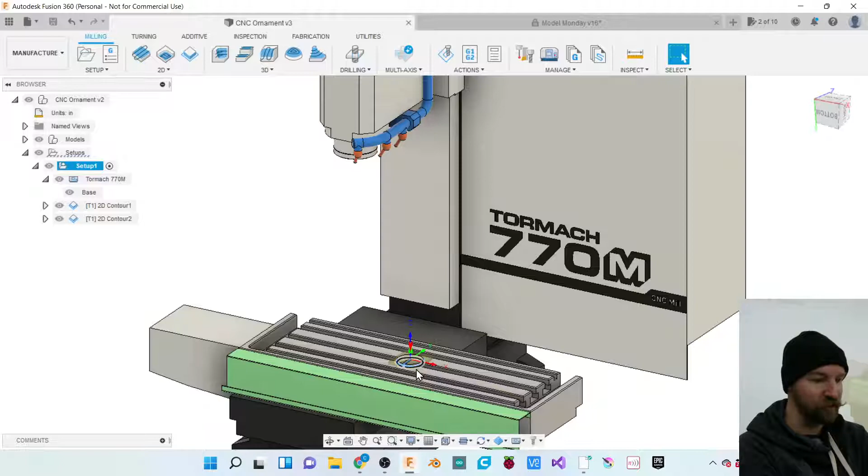So today we're going to draw a Christmas ornament. This was the terrible ornament that I drew as kind of preparation for class here, but you see it sitting here on our CNC machine at the other building. We'll make it fancier than just a circle. I'm thinking snowflake is what I'm thinking. But just as a test for myself, I made a little simple design just so I can walk myself through the whole process. And speaking of the entire process, let's get started.

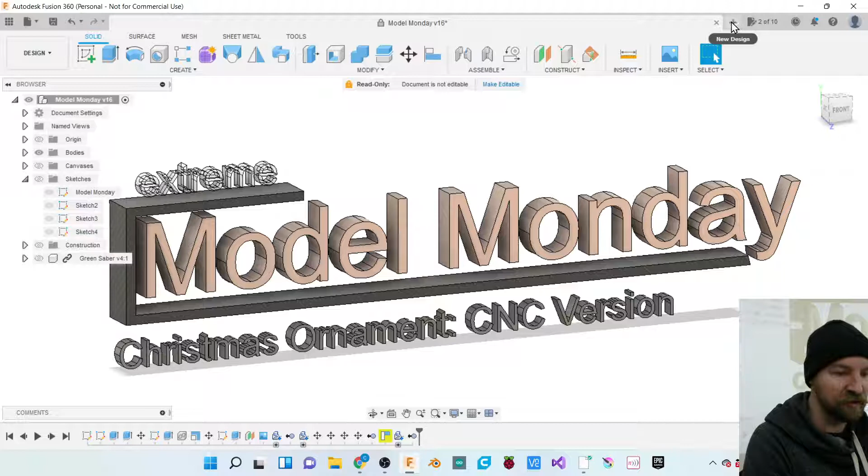So I'm going to start a new document here. I'm going to go ahead and close this document. And I'm going to go ahead up here to my new design plus button here in Fusion 360 and just start a new design here. And now I've got my design, and we can just start by drawing our Christmas ornament. Like I said, I'm thinking snowflake.

So for those of you joining at home, snowflake, I kind of Googled it. Or actually, you know what, let's do this. Let's leave it here, and then I'll show everybody. People, I Googled snowflake, and that's kind of what we're aiming at. You know, these are all six-sided designs.

Are snowflakes all six-sided? Mm-hmm. Is that a thing in like nature? Is that why the poles on Saturn are six-sided too? Is it like the same principle? I don't know. Anyway, all right. Probably. Nature, patterns, all that kind of stuff.

So we're gonna design a snowflake. I'll let you drink these in for a couple of seconds. Well, it's kind of like a weird three-sided, six-sided. There we go. That's what we need right there. Faces. That'll be a pain in the butt to draw. So we're going to be more like in this territory or maybe even that territory.

So we're going to draw a single branch of our snowflake, and then we'll use a pattern command to make a pattern of that. And then hopefully in the second half of class, we will be getting into CNC talk and setting up some tool paths to machine our snowflake out of our bricks of gold that we have.

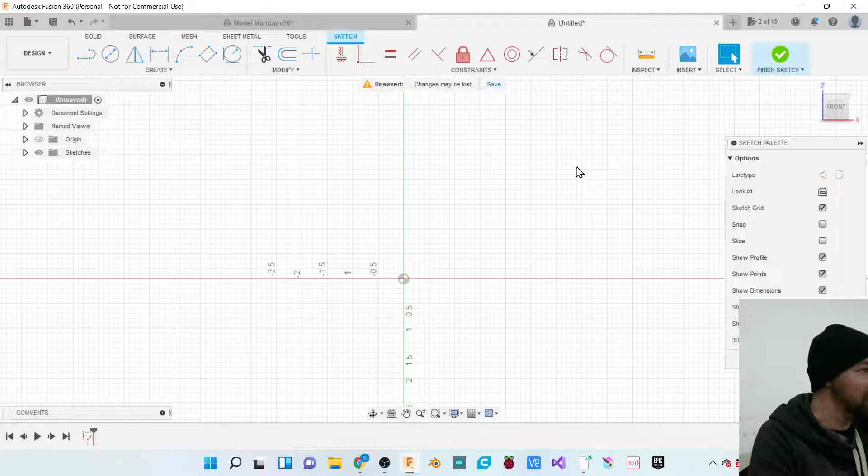So there are natural X, Y, and Z axes here. If you look at our navigation cube up at the top right-hand corner, you can see we're drawing between the Z and the X axis right now. It's totally fine. You can still draw on whatever plane you want to, and I'll show you how to work through that in the next step. I'm purposefully doing it in a way that I will have to make extra steps because normally the Z-axis is the top. Anyway, I'm getting ahead of myself. We're picking any plane to draw on, and we'll cross that bridge later, and maybe I'll reference back to this moment here. So I'm going to start by drawing a circle.

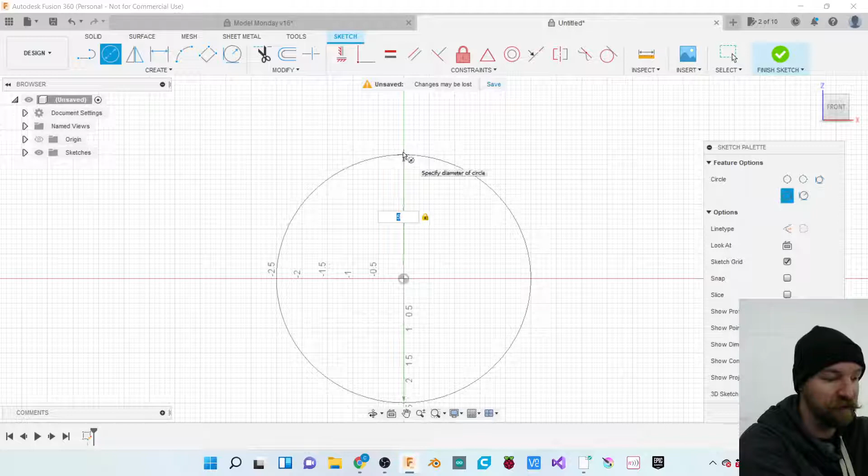So I'm going to grab my circle tool, my center diameter circle tool specifically, and I only want to draw a circle to start off with because I kind of want to define the outside boundaries of my snowflake. For me, it kind of makes sense to ask how big is my snowflake going to be in total? Maybe like 5 inches is a decent size for a Christmas ornament, good size Christmas ornament. So I'm going to type in 5 inches here and then go ahead and hit enter.

And I'm going to change that circle to a construction line, just because we're only using this as reference. I just want to kind of define a boundary for the outside of my snowflake here.

Now I'm going to do one more circle, and that circle is going to be the inside, like the innermost radius of my snowflake here. So I'm going to grab my circle tool one more time. I'll make that circle concentric on the larger circle. Maybe like 1 inch is a decent size. We'll be able to change that later if we want to.

Alright, now that we've got kind of the inner ring of our snowflake drawn, we can think about the, let's call them the arms of our snowflake, right? I'm going to go ahead and start by grabbing my line tool, and I'm just going to define a line that goes from the center of our circle all the way out to the outside edge of our largest circle here. I'm dragging this out straight horizontal. I guess this doesn't really matter. You could make this at any angle you want to, because we're eventually going to make a pattern of these things. But I'm going straight out horizontally here.

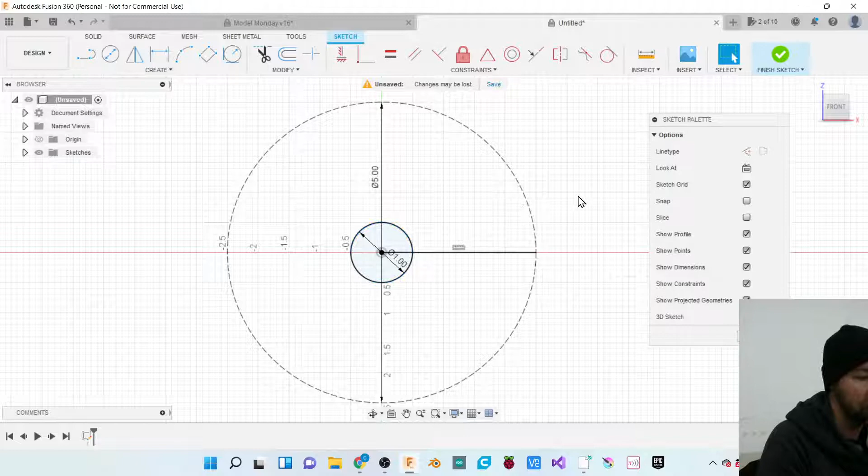And, you know, in order to make the edges of my snowflake, I'm kind of curious. If I just do a couple of things here, I'm kind of curious if this is something I didn't go ahead and do. I wonder if I can use offset. Oh, kind of. I can kind of use offset. Let's try to work that method. So let's define kind of the basic shape that we want to make of the branches of our snowflake just by adding some additional lines here.

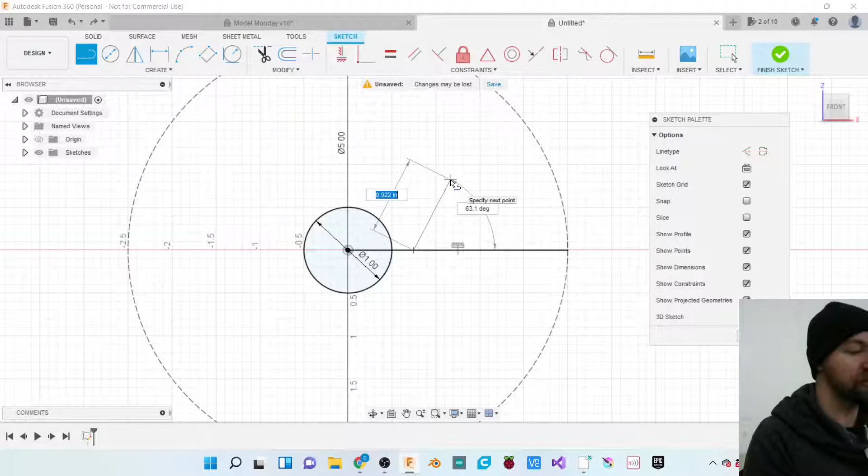So I'm going to grab my line tool and I'm going to draw kind of a line off to an angle like this here, and I'll make kind of a largish line. These are one of those kind of things that I'm just doing by eye, so you don't really have to type in a dimension here, but you certainly can. So if you're getting mathematical about it, this could be like 0.875, this could be like 7/8.

I'm only going to draw the lines off of one side of this because I can mirror over this line and make them symmetric. So I don't have to worry about trying to draw another line at this exact angle. Maybe I'll make 3 of these lines here. Something worth noting here, if I make a line like this and I say, oh, you know what, I'd really like all 3 of these lines to be parallel to each other, I can do that by adding some constraints after the fact.

Now, you can draw whatever lines you'd like and make them at whatever angle you want them to be. But if you want to, in this constraints menu here, we can choose this parallel option. And now I can click on the first line and then click on the second line, and that jumps into parallel, and I can even click on the third line, and that'll jump into parallel with that too, which is kind of nice. I can drag these around and move them wherever I need them to be here.

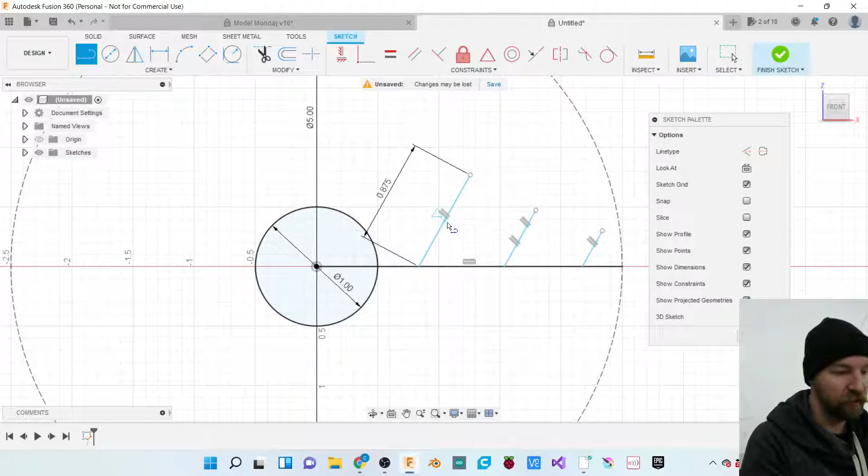In fact, maybe on this bottom, I might regret this later, but just on this bottommost branch here, I'll have another branch that comes off of it. So I'll give you a second to draw that, or draw what your snowflake is going to be.

Hey Tom, how you doing? We're doing snowflakes today. Snowflakes slash CNC ornament. So I hope you brought your brick of gold, because we're going to be machining it later.

And so the goal, I don't know if you're following along at home, but we've drawn a 5-inch circle that we've turned into a construction line, because we're just using this as a gauge for, oh, I suppose you can't even see my screen. I'm referencing my screen here. We're just using the circle for a gauge on how large our snowflake is going to be here. And now we've drawn kind of the basic skeleton. We also have a smaller 1-inch circle in the inside here. And then I've got kind of the skeleton of what my snowflake arm is going to look like here. At least half of my snowflake arm.

So once we've got our snowflake arm half drawn, in order to make a duplicate of that over on the other side, we can use our mirror command. So I'm actually going to do this twice, because I want to duplicate this arm of my snowflake arm as well. So I'm going to go ahead and grab my mirror tool from my create menu. So I'll go ahead and click on create, and then come down to mirror.

And the object that I'm going to mirror is that little line there. And then I'm going to mirror it over this line right here. And then I'll say OK. So now I've got that mirrored over, and I'm going to do that same operation for all these lines here. So I'll come up to the create menu, I'll scroll down to mirror.

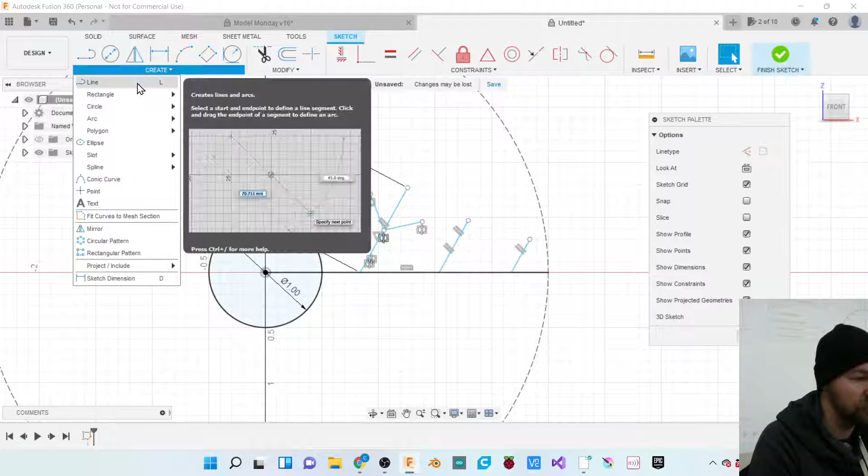I'm going to choose the objects that I'm mirroring. For me it's 5 objects, but you may have more or less depending on the kind of snowflake you've designed. And then the mirror line is going to be that line that we drew from the center of our circle all the way out to our 5-inch construction circle there. And then I'm going to say OK.

Alright, so now comes the fun part, because we've got the basic kind of skeleton of our snowflake arm, but we need to give it some thickness. It needs some mass. These snowflakes, they're not 4th dimensional snowflakes that are like folding through the 4th dimension so you can't really see them. They're like regular 3-dimensional snowflakes.

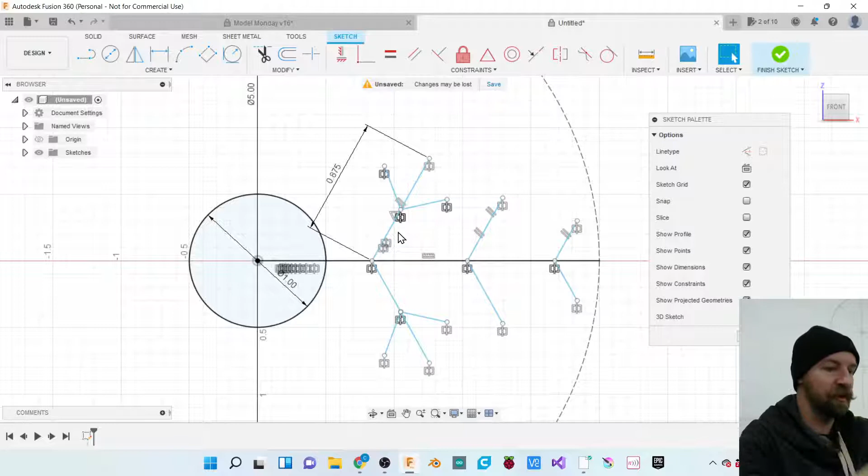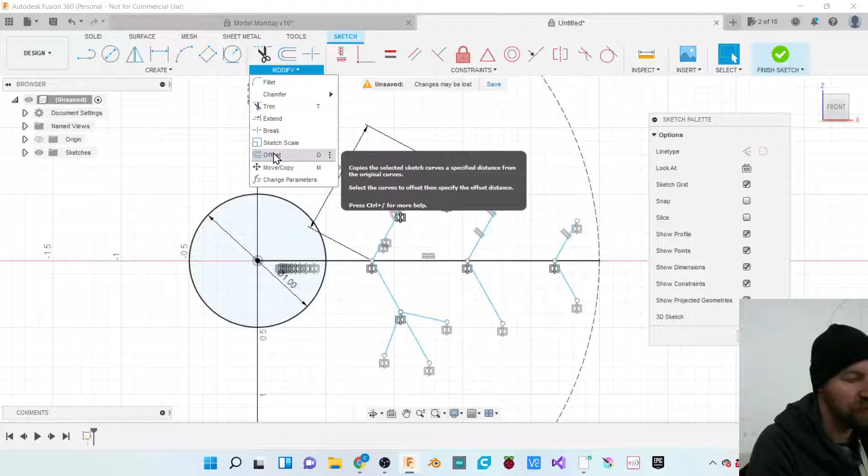So in order to give these some thickness, we're going to use the offset command. Alright, so I'm going to come up to modify and then choose offset. And I'm going to start with my individual arms here. So each of my arms, I'm going to click on both of them, and I'm going to offset them a distance of, let's say, is 1/8 of an inch too much? 1/8 of an inch is too much.

I think I want these things to be 1/8 of an inch total. So I'm going to offset them a distance of half of 1/8 of an inch, 1/16 of an inch, which is 0.0625. Or, in case you didn't know this, you can type in fractions. So if I want to do 1/16 of an inch, I can just type in 1 over 16, and I'll get 1/16 of an inch there. And it converts that to a decimal for me. And it knows that I'm working in a document unit of inches here. So that's why that works.

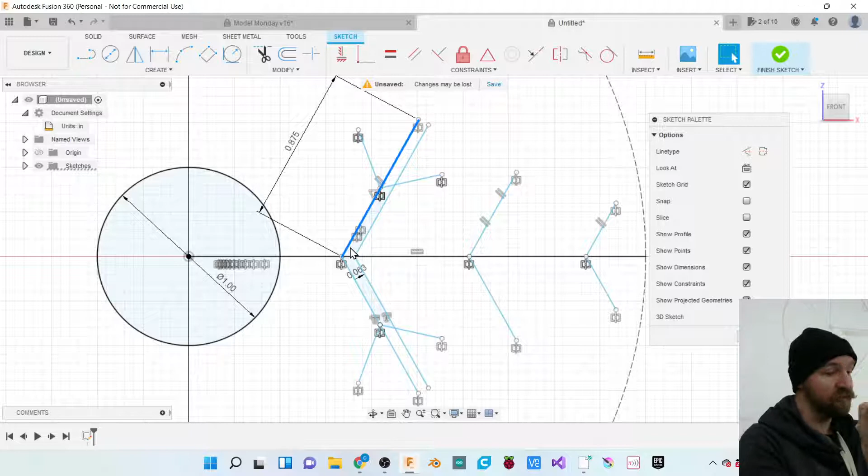Now, I'm going to do that a whole bunch of times because I want this skeleton that we've drawn to represent kind of the center of each one of these arms. So just to illustrate, I'm going to grab my offset tool one more time, except this time I'm going to offset a negative 1/16. And you can see that it's given our arm some thickness here, right?

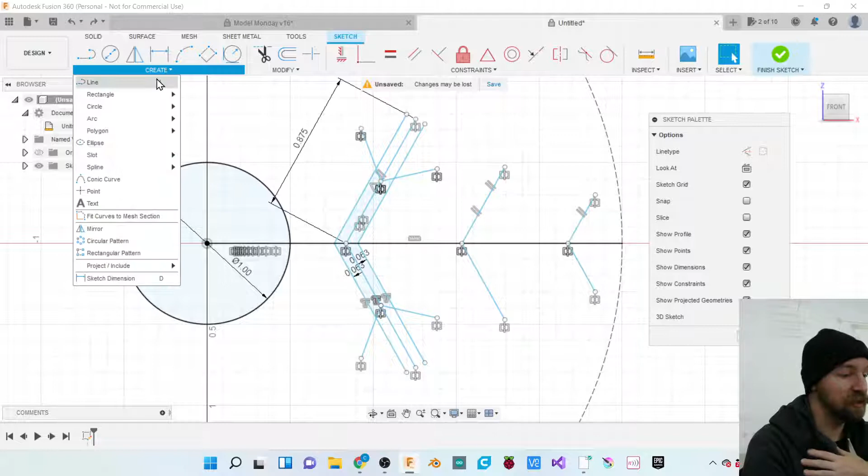And now in order to cap off the arm at the top here, because right now it's just open, you could just draw a line. So I could just take my line tool and I could close off that end. However, I think it would be nice to have these be nice and round. So I'm going to choose in mine to use a special kind of circle. From the circle command here, we're going to go ahead and grab this 2-point circle.

And a 2-point circle will just let us click one time on the one outside edge, and then click a second time on the other outside edge of that, and now we get a fully enclosed shape there that you can see that's nice and filled in there. I'm going to do that to the other side. So I'm going to click and place one side of my circle and click and place the other side of my circle.

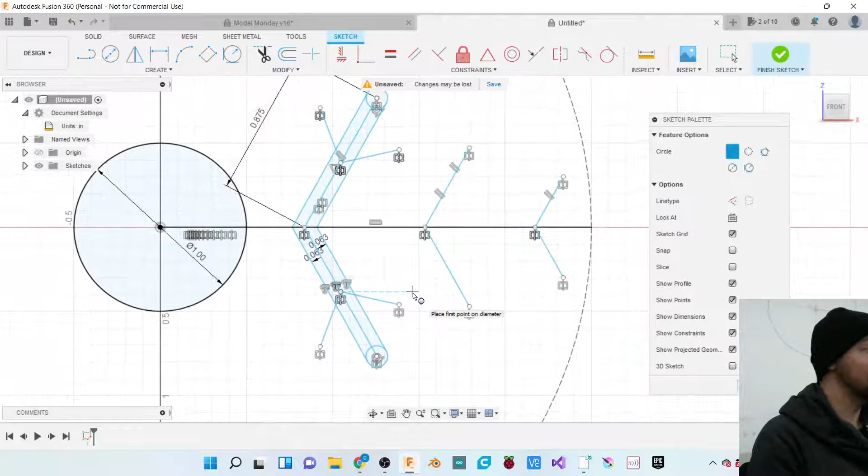Now I'm going to go to town and I'm going to do that operation a bunch more times. So for each one of these arms, I will need to offset it twice and then put some circles at the end of it. I leave it up to you if you've got some little branches on your snowflake, if you want to offset those the same distance. So if you want these to be the same thickness as the other branches or not, I leave that in your capable hands. You're making your own snowflake. You're not making my snowflake.

You're all special little snowflakes in my book, though. That's the important part.

Alright, so 1/16 of an inch.

And a negative 1/16 of an inch.

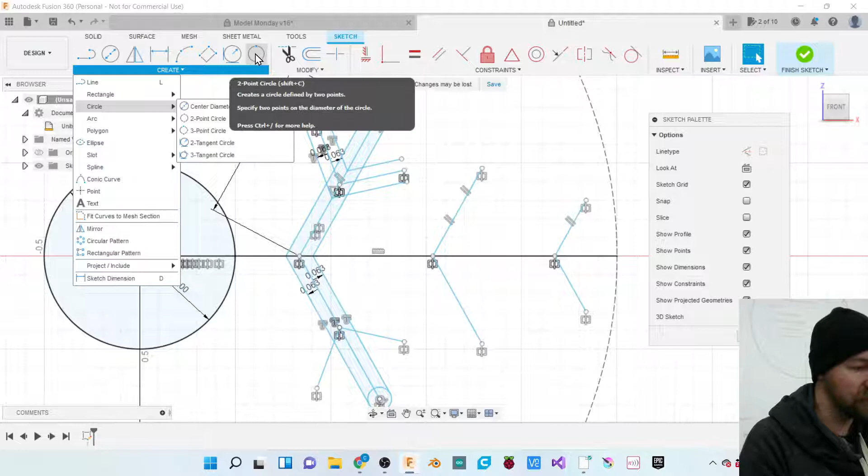Here's one of those occasions where it's like, alright, I know I'm going to be grabbing that 2-point circle command quite often. So if I come up here to this 2-point circle option and click on the little 3 dots that appear when you're hovering over a tool, I'm going to say pin this to my toolbar, and then it adds an icon right up here at the top. So now I can just click on that icon, and it's real easy for me to do those offsets and add my circles faster.

The keyboard shortcut, just in case you are curious, for offset is the O command.

You can bring that to your next Christmas party that you're attending. You know, when you're hanging out at the company Christmas party, talking about keyboard shortcuts, as one does.

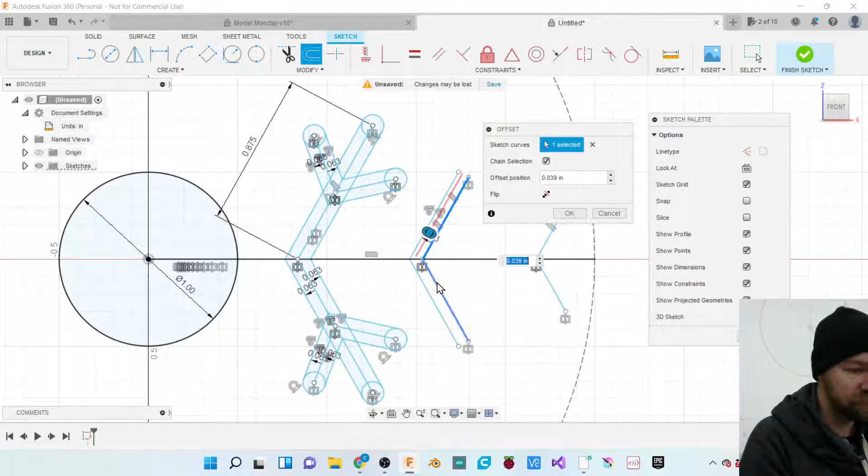Does anybody have any questions so far? I do. So rather than having to do all of these offsets over and over again, couldn't we have done all of the offsets on one side and then mirrored everything across? Okay. You could, yep, totally. Fantastic point. So we mirrored all this stuff from one side over to the other side, and now we're having to offset twice as many things, literally. So yes, we could have offset all these things first, and that probably would have been the smart way to do things.

But I ain't that smart. So, think about how much practice you're getting now using the offset tool. Like so much. On a scale of 1 to so much practice, you're definitely getting so much.

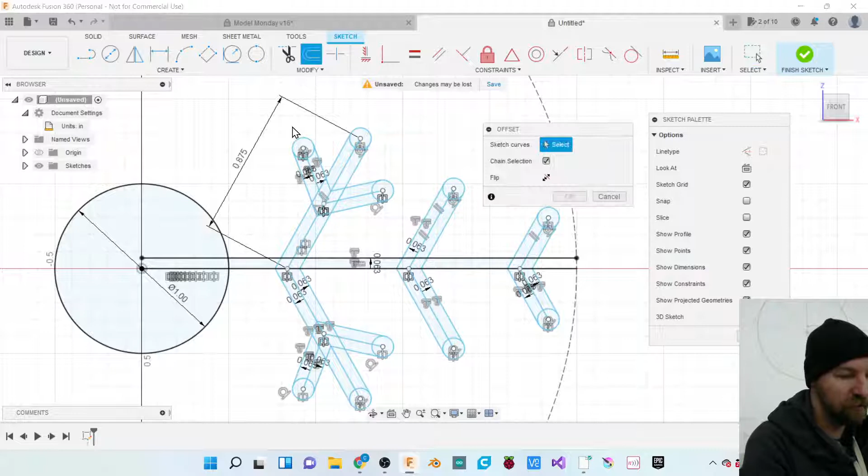And I just have one final offset and circle to do, and that's for this central shaft that runs down the middle of my snowflake arm here. So that's my last offset. And then I'll check in with you guys, see where you're at with your offset parties.

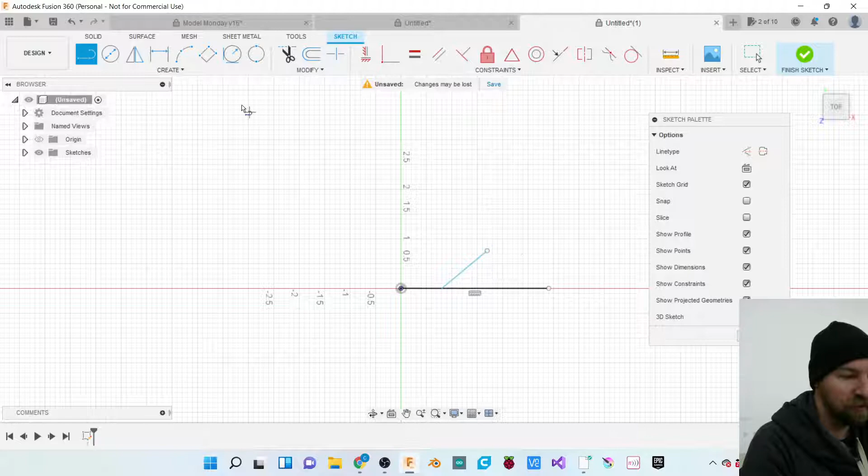Also kind of curious, I've been learning for another class, for the January class, I think we're going to delve into making surfaces instead of dealing with the solid environment. And I'm kind of curious, how are you guys doing? Are you still making your lines? So I'll just do a little experiment for my own purposes and the enjoyment of people watching at home. There is an option here in the surface environment called thicken, and I'm wondering if we could have used that.

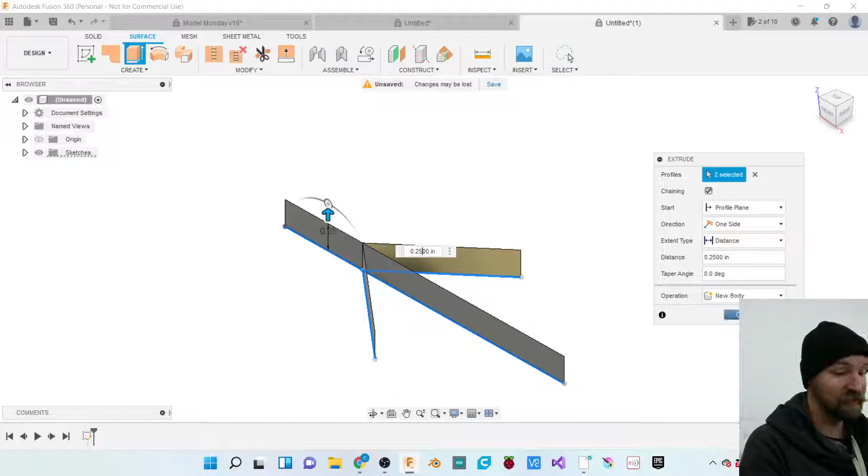So if we've got our little snowflake arm here, normally I keep telling people, oh, you gotta have a fully enclosed shape to extrude it. That is not 100% true, because in the surface environment, you can just extrude flat planes, basically. And so here I've extruded these flat planes that are kind of like the branches of my snowflake, right? And I was just thinking, can I use this thicken command now to give it some thickness? Make it symmetric. Sure can. That 100% works.

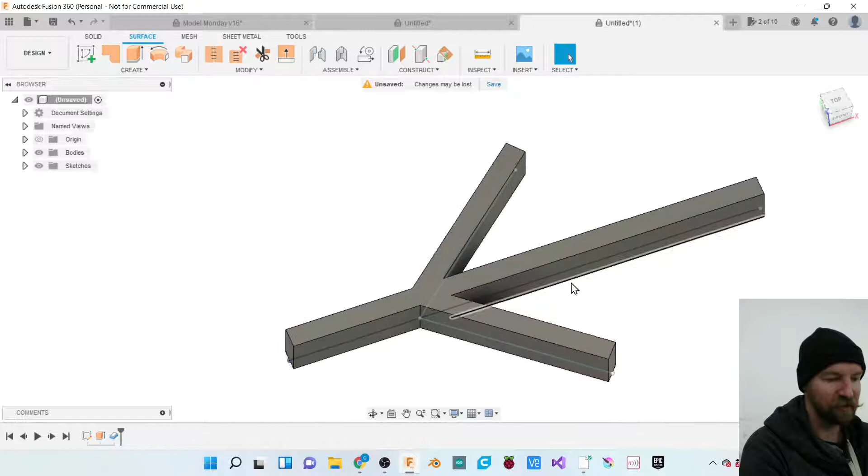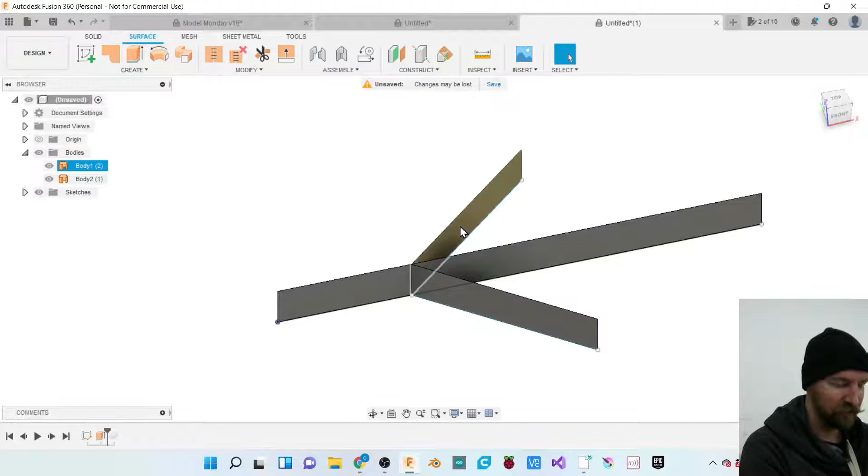So there's another way to do this. Now we don't have our filleted edges here, but that's 100% another way to do that. So the way that I did that is I drew my lines, I drew my shape, whatever kind of arm you're going to have here, and then I extruded them in the surface workspace. This is kind of outside the scope of where I was trying to go with class, but I was just kind of curious. And then I used this thicken option to give them some thickness. So I was able to give some branches of a snowflake some thickness, except I didn't have to do any offsets.

Well, but then that would have robbed us of the offsetting. Yes. Yeah, exactly. And I don't rob you on purpose. I only rob you on accident in this class.

All right. So we got an arm. Cool. Everybody's good? Mike, you good? Slowly. Should I keep going, or you feel like you're in a good spot?

Good-ish spot? I'm okay. I have a feeling Mike's drawing a very ambitious snowflake, which I support.

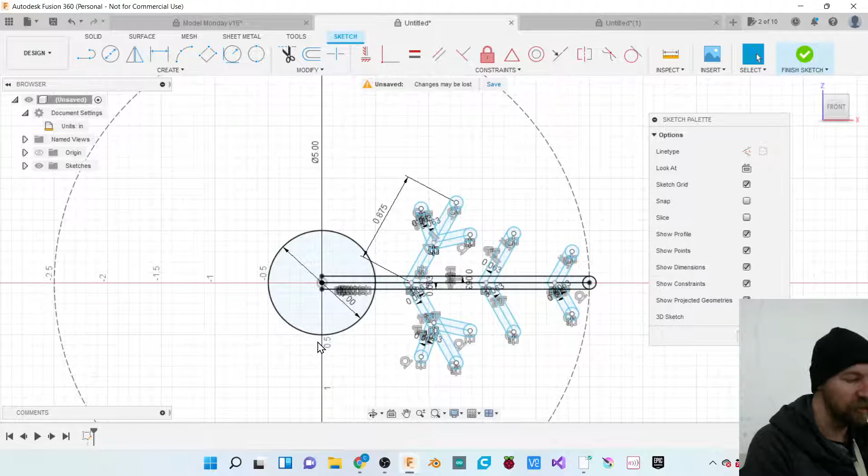All right, cool. So we've got all of the arms of our snowflake drawn, and now I'm going to take a cue here, because we could make a pattern of this drawing and then we'd have a whole lot of stuff that we'd have to go and click on to extrude. But instead, let's just extrude the single arm, and we'll choose to make a pattern of the body instead of a pattern of all those lines. So let me show you what I mean here.

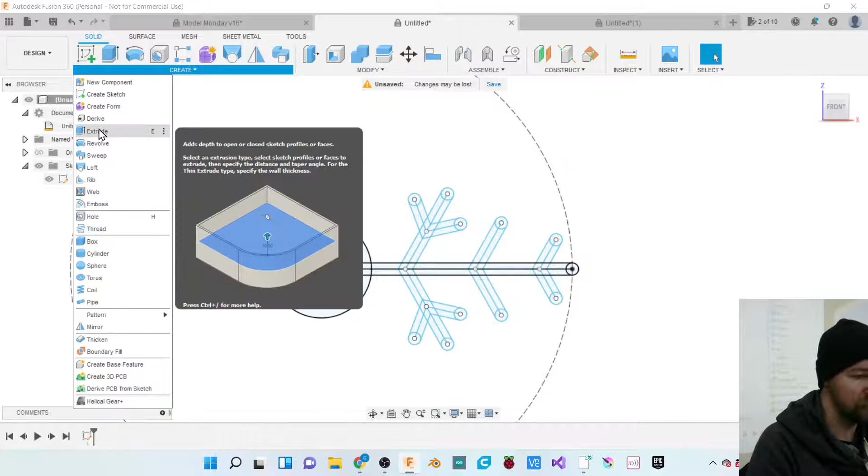So we're gonna say finish sketch. I've got a sketch that I can name now. This sketch is called Snowflake Arm. And now I'm going to extrude said snowflake arm. I'm back in my solid working environment here. So I'll come up here to create and then come down here to extrude. And I'm going to extrude out all these little kibbles and bits here.

In fact, you know what? Maybe this is a good opportunity. See, my Fusion does this a lot. If yours does this too, I am never going to choose this method of selecting. It's never going to be a selection option that I choose because it doesn't make any sense to me. I don't like it. So in this select menu here, you can choose a different selection, and window selection is just objectively better. Feel free to argue with me in the comments. You will be wrong.

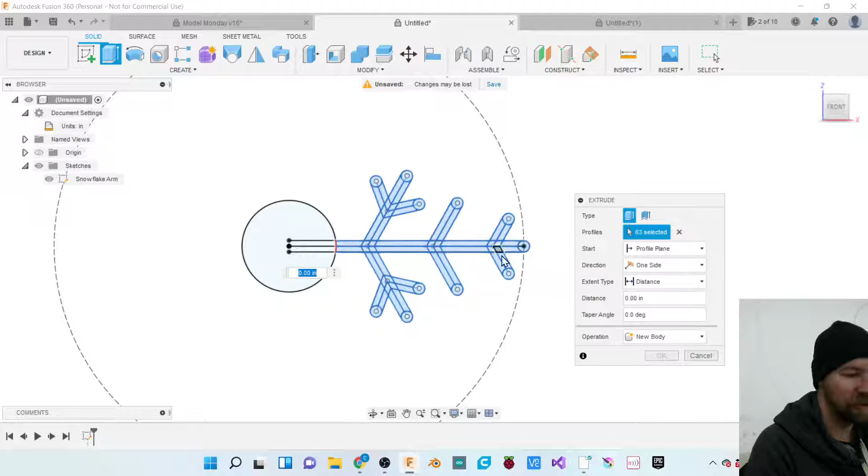I can just select everything, all these outside bits here. I don't need to include this circle. However, if I accidentally drag my window over that, I can just unselect it afterwards. So now I've got all my bits of my snowflake here, and I'm going to extrude them a distance of, let's make it 1/8 of an inch. Seems like a decent sized Christmas ornament thickness. It'll be fine. Alright, cool. So 1/8 of an inch, and then I'm going to say okay. Again, we can type in the decimal equivalent there, or I can type in 1/8, and that will get me to the same place.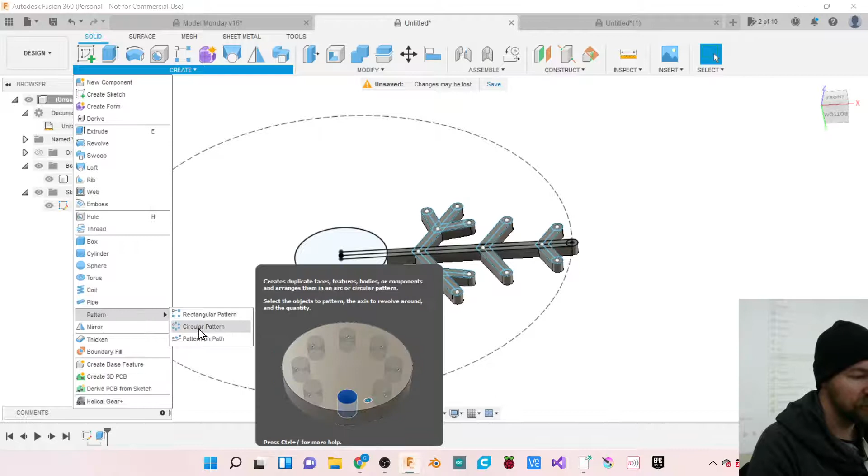Alright, so now we can make a pattern. We've got a body. I'm actually not going to name this body right away because we're going to end up adding to it. So now we can make a pattern of this body. We'll click on the Create menu and then come down to the Pattern option and then Circular Pattern. Now we want to make a pattern not of type faces. We want a pattern of type bodies. So I'm going to choose that bodies option. I can either choose my body in my bodies folder in my browser, or I can click on it in my drawing view. Either one will get me to the same place.

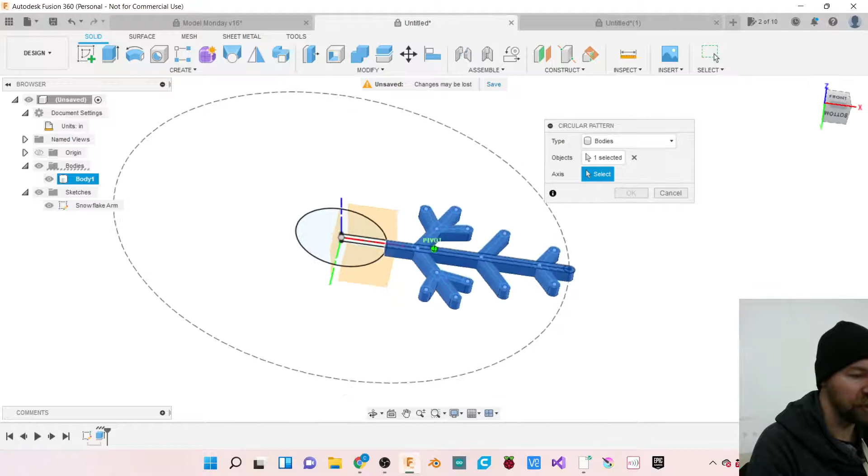And then we're going to choose an axis to revolve that around. So I'm going to click on this select button here, and now I can pick one of the circles that I've drawn, or because I've drawn this around my origin, I can also choose this green axis, which runs right through the middle of the circle. Either one of these circles or that green axis will do the job for me. So I'm just going to pick this circle here.

And now we've got kind of ghosted out images here, and we've determined that snowflakes come in 6s. So we're going to follow the laws of thermodynamics, I guess. Or I guess if it's a Christmas ornament, these follow like Jesus rules. It's Jesus rules. I think you're right. Okay. So quantity is 6.

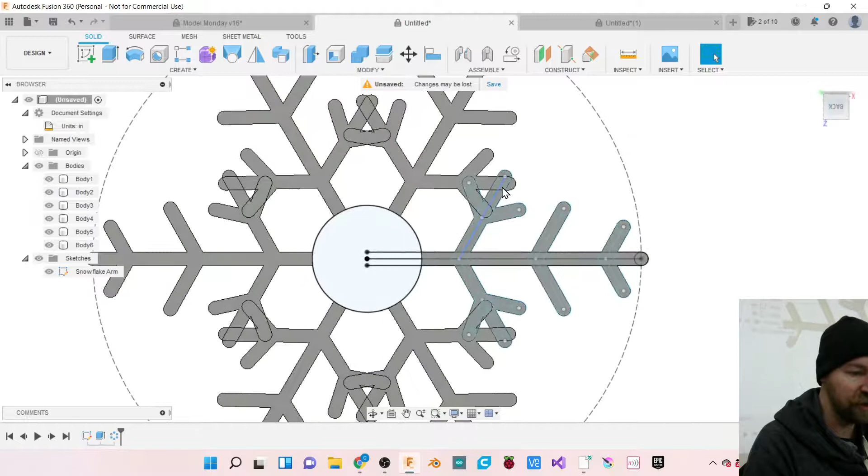And there we go. So we can see that I've got an issue here, and that issue being the arms of my snowflake are colliding with each other. And if you're having this problem too, it's a fairly easy problem to solve. You know what? I don't even know if I need to go edit my sketch to change them. Can I just click and drag on this? Kind of. Not really. So I'm going to go and edit this sketch. And now I go back in time to when I was making this sketch. For some reason I'm looking at the back now. And now I should be able to...

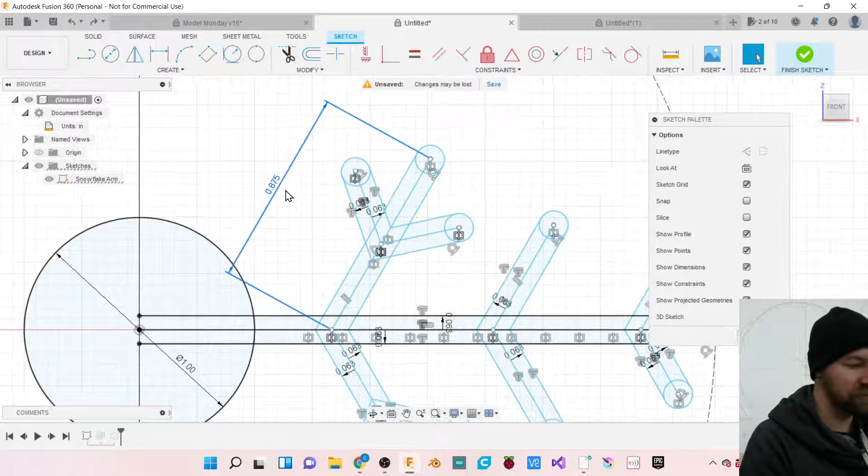I should be able to shorten this, because I defined a distance there. So, tell you what. One thing you can do, instead of defining this distance, I really just want to be able to click and drag on this thing and move it around. So I'm going to highlight this distance that I wrote in here, and I'm just going to delete it.

And now that that's deleted, no, that doesn't want to do that either. Can I drag you in? Do you want to drag in? Not really. So I really need to specify a distance here.

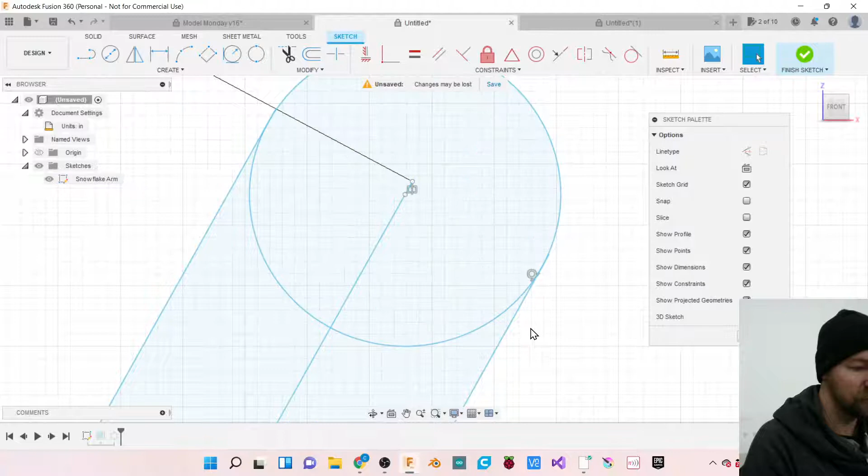Well, that's pretty interesting. So I'm looking at my drawing a little bit closer here. I would expect that these circles that I drew, the center of them would be at the end point of that line that I drew. But they are not, which is kind of interesting. So I'm going to go ahead and add that constraint now after the fact. So I'm going to use a coincident constraint just to...

No, it doesn't want to do that. Please try revising dimensions or constraints. It's interesting because you'd think that that would be concentric, but they are not. So, all right. So what I'm going to do is I'm going to come in here and, gosh, I guess I'm going to delete those, because it doesn't really want to let me move them around. Well, that's kind of it.

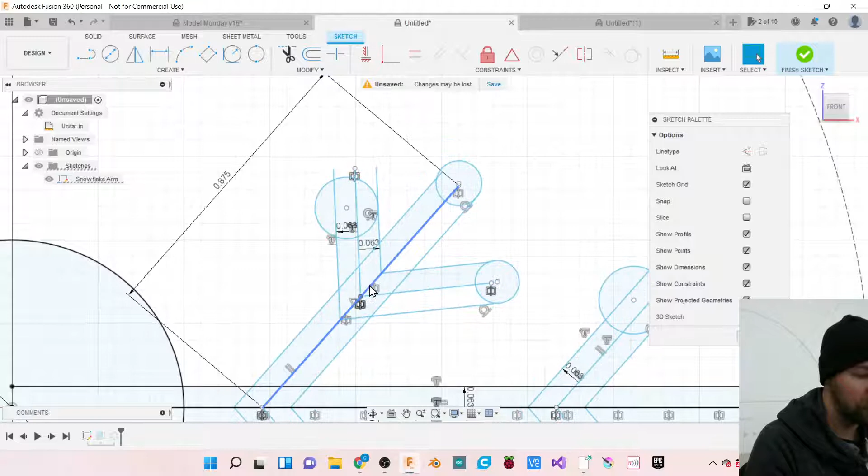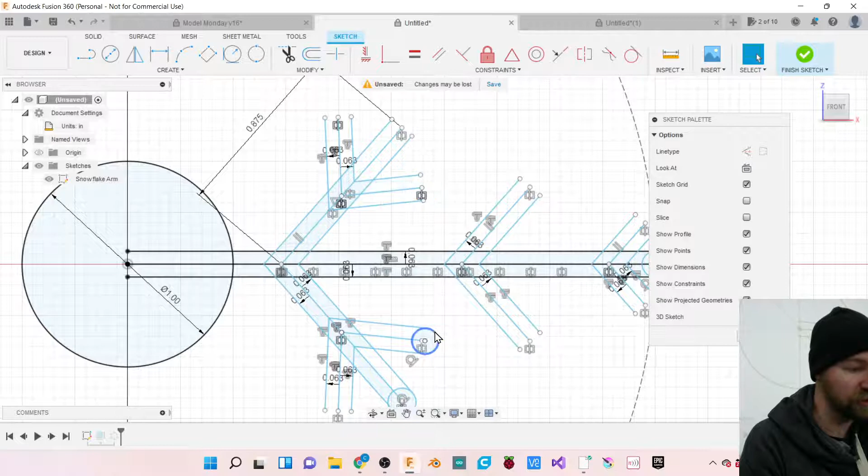My end circles aren't constrained, funnily. Or really, none of this is constrained at all. So you can see that my drawing here is completely blue, and blue means it's unconstrained. Maybe drawing these circles at the end, I think, is screwing me up. So I'm going to delete these circles, and I'm going to see if that solves my issue here. Yeah, it's those circles that were giving me grief.

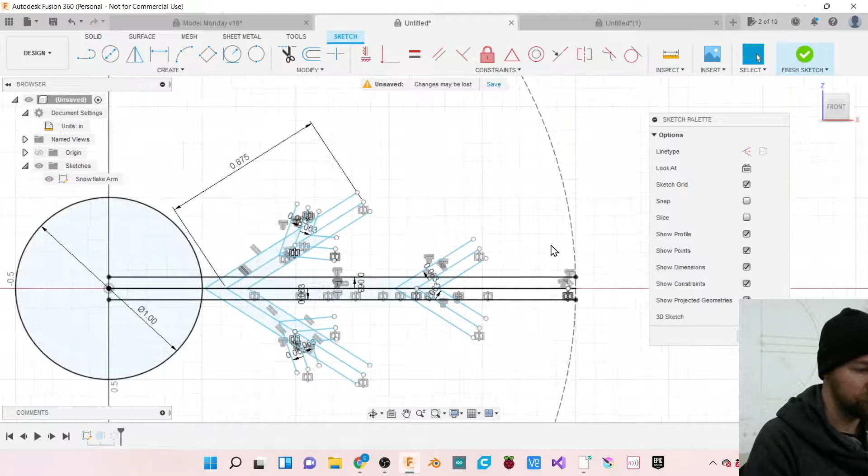So now I can hike those in a little bit. I can move these to whatever position I need them to be here. That's a weird dimension there. Alright, so let me try adding those. You know what, instead of a 2-point circle at the end, let me just do a center diameter circle, because I feel like that's going to do the same thing. I have a center point, and in addition to

you know how when you thought the easy part of class turns out to be the most frustrating?

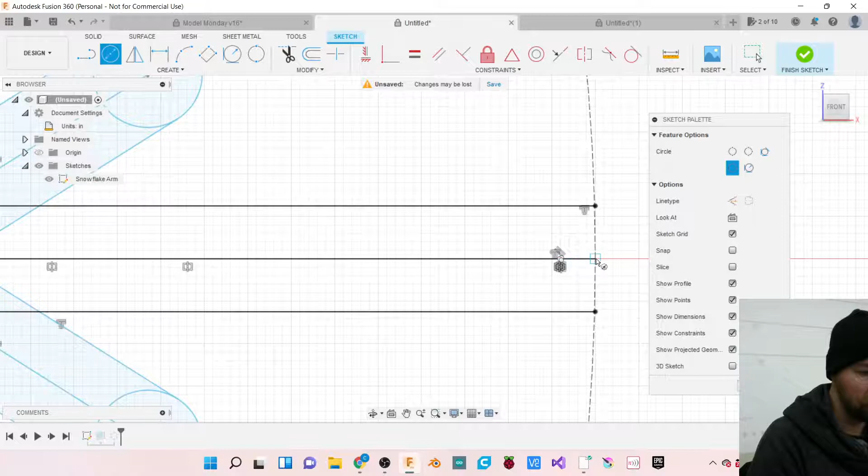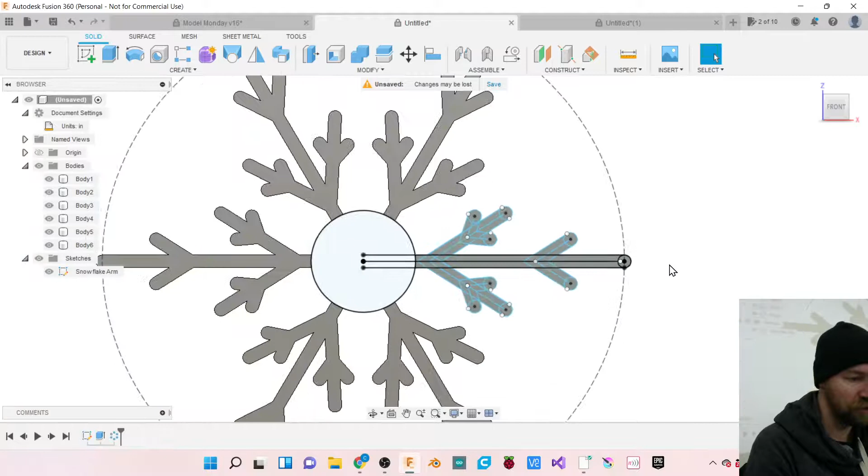Alright. And somehow I lost a line over there. One of my offsets just mysteriously disappeared. -1/16. This is what happens when you start moving around unconstrained sketches. Alright, so now if I say finish sketch, that kind of worked, only it's missing some things here. And my extrusion, and I'll say okay. There we go. All right, cool. That will do just fine for me, I think.

So now we need a central hub here, so I'm just going to go ahead and extrude out this central hub. So I'll click on the extrude item one more time. I'll choose that central hub, make it 1/8 of an inch, and when I extrude out this central hub here, I'm going to choose join. And hopefully what that will do is take all these 6 bodies that represent each of the arms of my snowflake, and join them all together into one body. And now that I've got all those things joined into one body, I can name this Snowflake.

Alright, cool. So now that we've got a snowflake and we're thinking about making this out of our brick of gold, we should first probably save it. So I'm going to go ahead and choose to save it. I'm going to call this CNC Snowflake. I have a project that I made. This is a habit that I've been trying to form for myself.

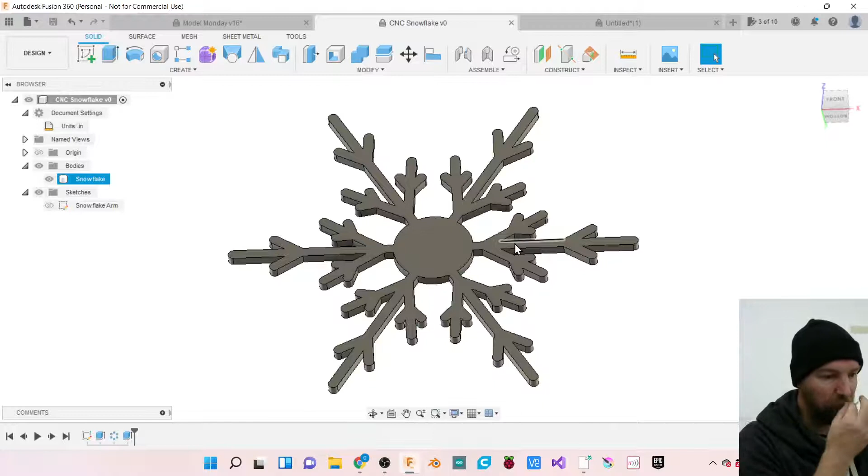So, in order to generate the G-code that we need to cut this out on one of our CNC machines here at the Makerspace, we'll need to leave our design workspace up here in the top left hand corner. So I'll click on design, and then instead of the design workspace that we're in right now, I'm going to come down here to the manufacture workspace. So if I choose this manufacture workspace, all of our tools at the top change, so we've got all of our different kinds of tool paths that we can choose to make our snowflake out of.

And we've got our browser here, but now our browser doesn't have bodies and sketches. It does. If you spin down this models folder here, and then this is your component, the document component, and then here are our bodies and our sketches buried kind of in there. You probably won't need to look at that a whole lot.

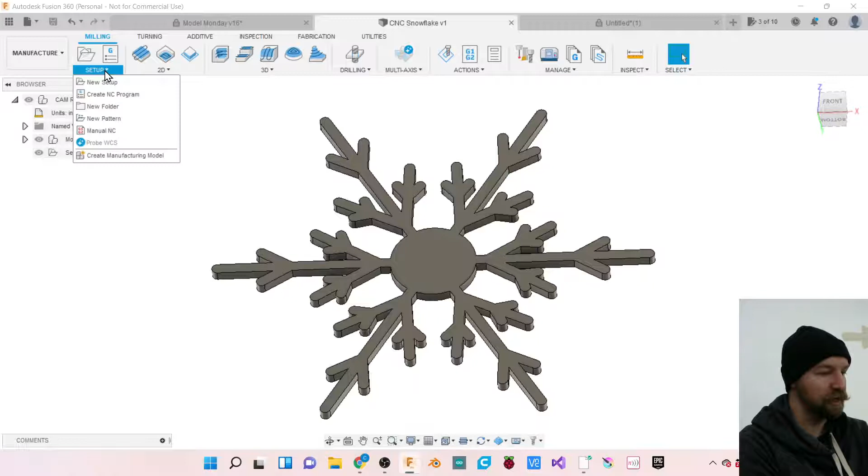The first thing that you will need to do is to generate a setup. So if we click on the setup menu here and choose new setup, a setup kind of tells you what you need to know on your model, where the 0, 0, 0 point is that the CNC machine can reference. So one of the things that we're doing here in this setup is that. The other thing that we're doing here in this setup is defining the block of material that you have in order to machine your snowflake out of.

So first let's get our 0, 0, 0 point in the right spot. Our origin is what they call that. So this guy right up here. First we need to get this pointed in the right direction. So my z-axis, I want it to be pointed straight up away from my snowflake here, and it's kind of pointed sideways to it. So in our setup window here, the orientation right now is set to model orientation.

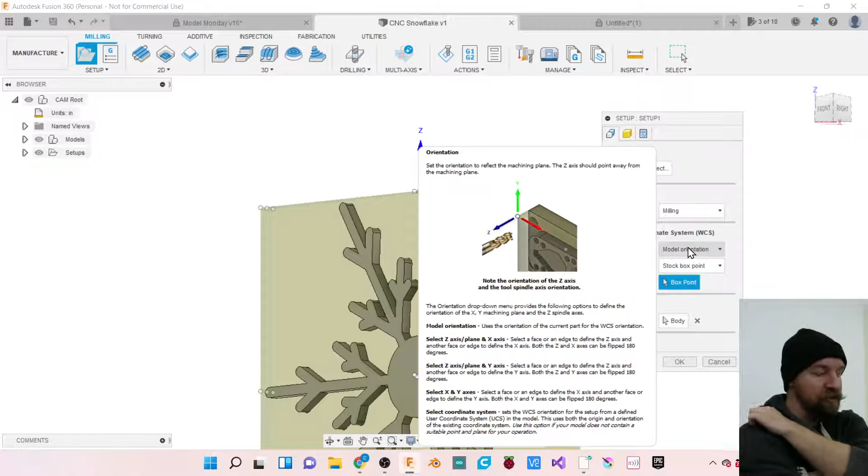So this is kind of what I was talking about when I mentioned which drawing plane you choose when you start Fusion 360. If we would have started drawing this model on the top, then it would have had the z-axis pointed in the right direction, and we wouldn't have needed to mess around with this. But it's nice to know that you can change that orientation, because not all the parts you'll be able to draw in the same orientation.

So we're going to change it from model orientation to select z-axis/plane and x-axis, or select z-axis/plane and y-axis. Either one of these options will work for us. Really, it's the z-axis that we need to choose here. So the z-axis right now is set to nothing. And if I just hover over my model and pick the face of my snowflake here, and I click on that, you can see that my z-axis is now pointed straight up and looking in the right direction.

If you want to, you can specify either your x or your y-axis depending on which one of these options you chose. But it is not necessary. As long as you get your z-axis pointed in the right direction, which is up and away from your model, then that is your happy place. Alright, so now we need to get this origin in the right spot on our imaginary stock here that we've got in front of us.

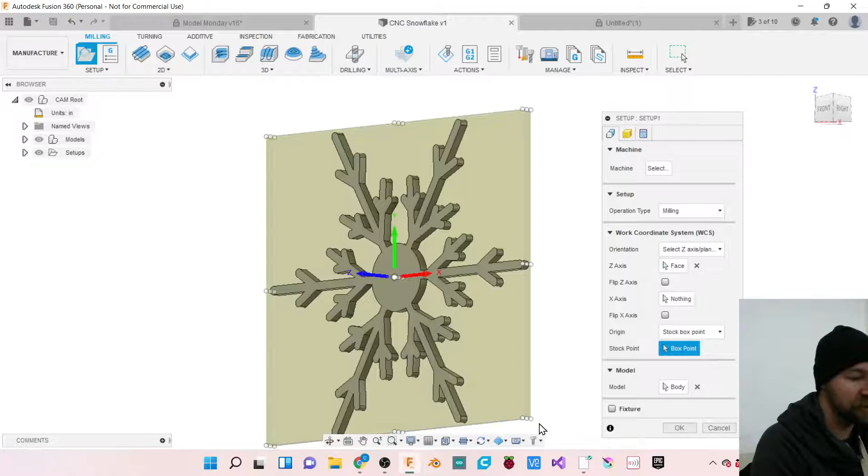So it is possible to locate your milling bit right in the center of a piece of stock. However, it is much easier to locate your milling bit on the side of a piece of stock. So what we want to do is we want to have this origin here be in one of the corners of our stock. So if I just click on the little center point of this origin, now it lights up a whole bunch of other little white dots around our imaginary stock here. And I'm going to zoom in and I'm going to choose the top right corner.

Tom is a machinist. He's kind of joining us online here, and this is a rule of thumb that I use. And Tom, I feel like I've asked you if I'm crazy or not before, but I always do this so my origin points away from my material. And the reason I always do this is some machinist here at the Makerspace said this is a good practice to be in, because when you're standing at your machine and you see a negative number on your machine dial for whatever axis you're on, you know that you're over the top of your part.

If it's a negative number, you're removing things from your part. If it's a positive number, then you're off here in the middle of nowhere somewhere and you're not over the top of your part potentially. So that is a rule of thumb. I think more importantly, just have a strategy for yourself that you always do, and it'll be easier for you to just pick up this piece of G-code and use it in the future if you want to make the snowflake again. You don't have to remember things.

All right. The last thing that we're going to do here in our setup is we've got a tab in our setup window, and the next tab over is our stock. So right now, the default mode is set to a relative size. I would say you should always change this to a fixed size box. And what this means is these are the dimensions of the brick of gold, or your piece of plywood, or your hardwood, or your piece of aluminum, whatever it is you're going to put in the CNC machine.

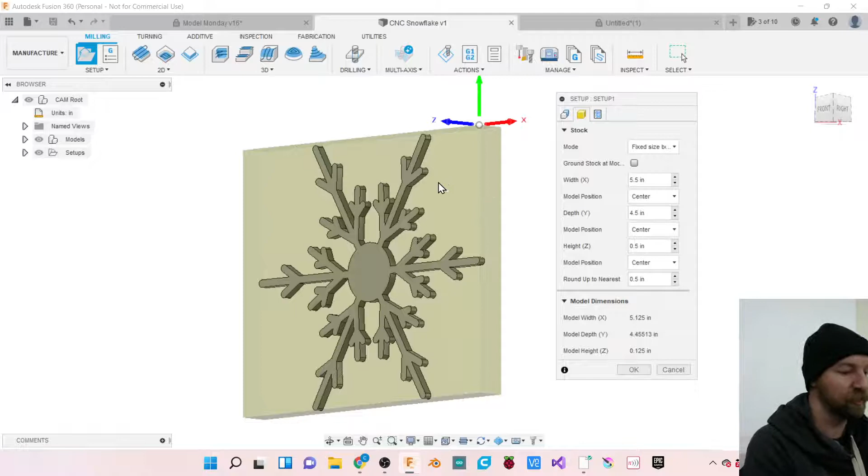It has dimension. It's got length and width and height or thickness, and you should take that stock and you should measure it, and you should replace those dimensions right here. So if you've got your piece 7 by 5 and it's just the right thickness, it's 1/8 of an inch in this case, then you should enter in those dimensions and know them and have them. And then your model sits within it, and you're good to go. So I'm going to go ahead and say OK.

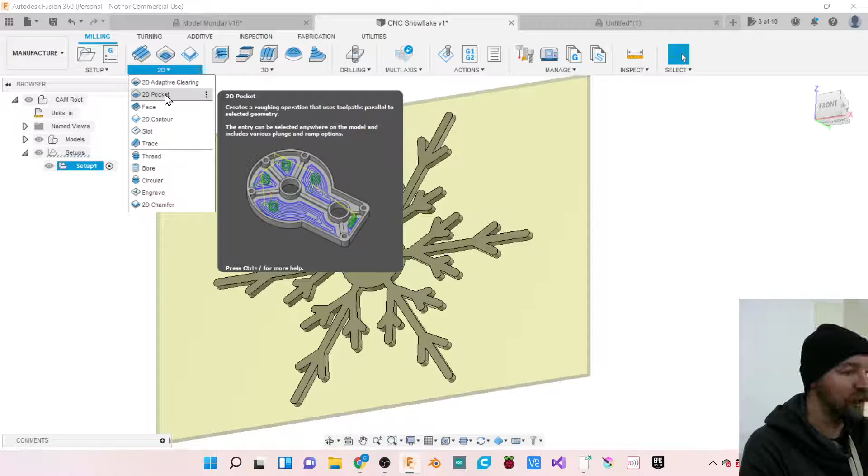Now we have a setup generated. Now we can actually make some tool paths. So this is a really simple shape that we're cutting out. We're only going to need one kind of tool path here, and that is a contour tool path. This is maybe the biggest help that these tooltips are in all of Fusion 360. You get these pictures with tooltips everywhere in Fusion 360. However, in my opinion, they are the most useful here in the machining workspace.

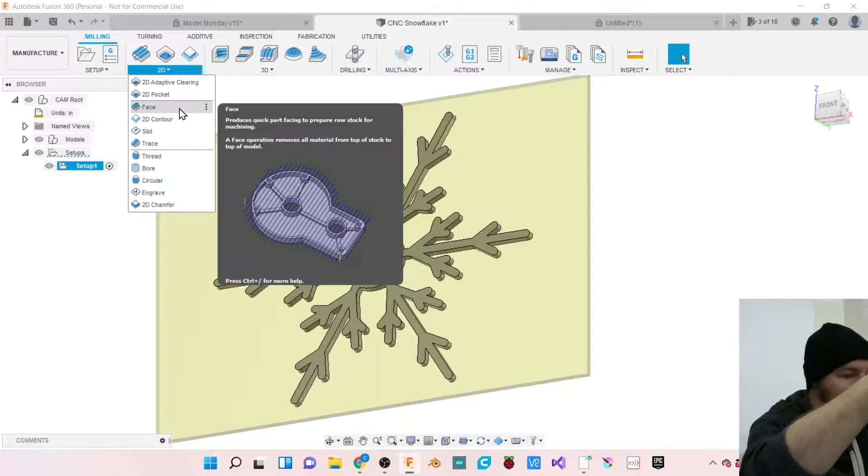So the blue lines that you see in these tooltips are the paths that your router or your CNC machine are going to take as they are following the instructions that you're about to give it here. So if you're unsure of how to make the tool do a specific thing, you can hover over these options and go, oh, do I want the tool to run across the surface all at the same level? Oh, that's a facing operation. Do I want to run around the outside of a part and maybe also the inside of some holes? Well, that's a contour operation.

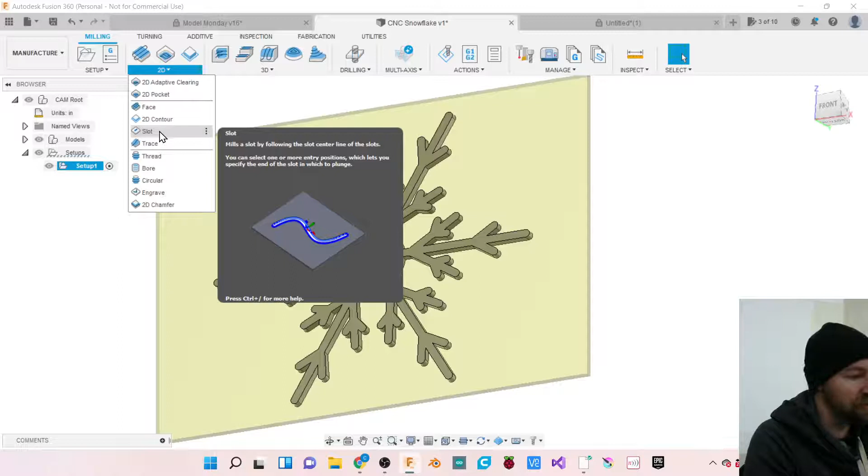Do I want to make just a groove or a slot right in the middle of a part? Oh, look, there's a slot operation for that. So these tooltips are super handy, and I would encourage you to take a peek and see if there's one that fits the specific operation that you're trying to achieve. These 2D operations are probably most of what most people will do here at the Makerspace with Fusion. However, there are 3D options too, where you can make all sorts of crazy cool 3D shapes. But right now, like I said, we're just going to use this contour option. So I'm going to go ahead and choose this 2D contour.

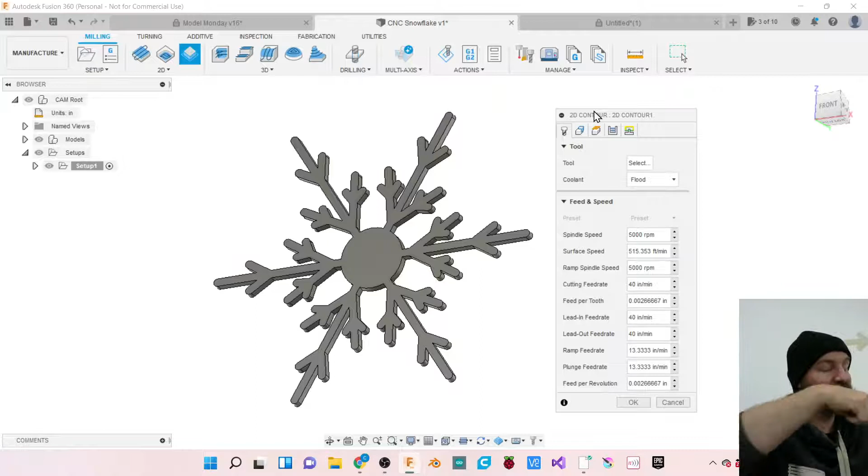Now we get into a complicated area here. So I was asked to do this class so we'd have this recorded. And traditionally in this class, I don't talk about feeds and speeds. And that is going to be especially true now that this is being recorded for YouTube. When I say feeds and speeds, what I mean is how fast is your spindle going around and how fast is it moving across your work surface, how fast is it cutting, basically.

The reason I don't talk about feeds and speeds is because I don't know what you're cutting into, I don't know what you're cutting with, I don't know your tool, I don't know the machine, I don't know the material, and all those things are important when you are generating these numbers. And I don't want somebody to cut something out here at the Makerspace and be like, oh, well, I watched the YouTube video where Carl said to set it at 40 inches a minute, so that's what I did, and then I broke the Tormach. So just for the record, I did not say that.

What I am saying you should do is go to Google and look up a nice feed and speed calculator. Tom, do you have a feed and speed calculator that you like to use online?

Oh, okay, cool. Machinist Handbook. All right. So here you go. So you should go online to Amazon, and you should buy yourself a copy of the Machinist Handbook. I'm sure there's a lot of great reference in here. If you want to get into CNC machining, this is a book that you will hear people reference. It will probably be full of information and

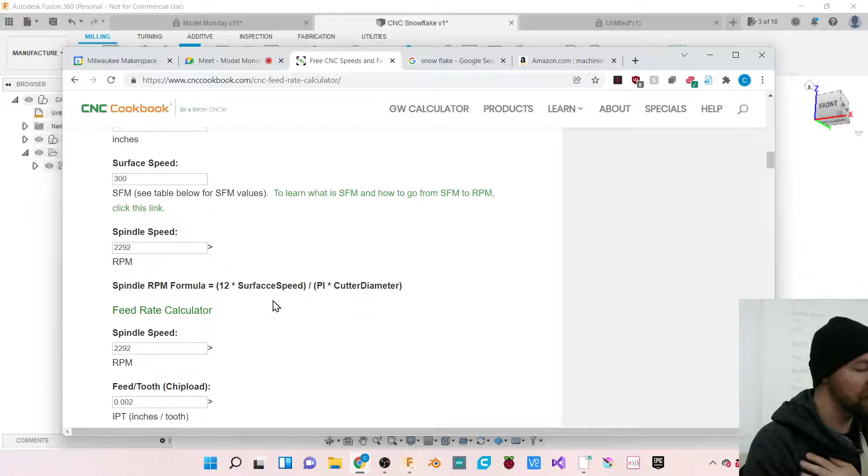well worth $52. However, if you just want to make a couple of cuts, you can look up feed and speed calculators, and you can find websites that will give you information. You'll enter in stuff like the number of flutes on your cutting bit and the spindle speed of your routers. Some of our routers will go to a faster speed than others, so that'll be something you'll have to factor into this calculation here.

And once you do your research and get your feeds and speeds right, then you'll take those numbers and you'll modify them here. I will say that Fusion does a decent job of getting these numbers to be pretty close. And the way that you do that is by first selecting the tool. So if we come up here in our contour menu, the very first tab is our tool menu.

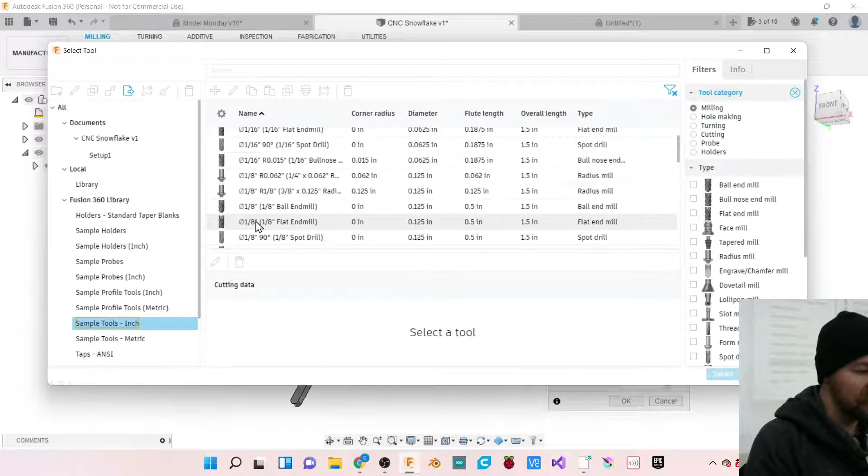If I click on this little select button, we're probably going to run a couple of minutes over if that's okay with everybody. So I'm going to come down here to my Fusion 360 library, and I'm going to come down here to Sample Tools Inch, and now I'm going to pick out a tool, and I'm going to go ahead and just pick out 1/8 of an inch flat end mill here.

Now this has some properties associated with it, so it knows how long, how wide the mill is. It knows the shoulder length. I believe it tells it how many flutes. Here, the number of flutes is 3. So this is some of the information that you would get from that feed and speed calculator that's associated with this tool. If you happen to have a 3-flute end mill that's 1/8 of an inch, then this is a good tool to choose.

And the other new thing, where is that? Where's the new option? Why isn't it letting me pick? Oh, here we go. Here's this preset here. This is a fairly recent addition. These presets give you a pretty decent approximation of an okay feed and speed. So here are aluminum, there's brass, there's copper, there's various kinds of steel and plastic. Wood is not listed here, so you're on your own as far as that goes.

But for example, if we were cutting this out of aluminum and we're just roughing this out right now, then this is a decent starting point, assuming you have a spindle that'll go 1200 RPM. But again, do your research on your feed and speed, look up a good calculator. And now that I've said my disclaimer, we're going to move on to geometry.

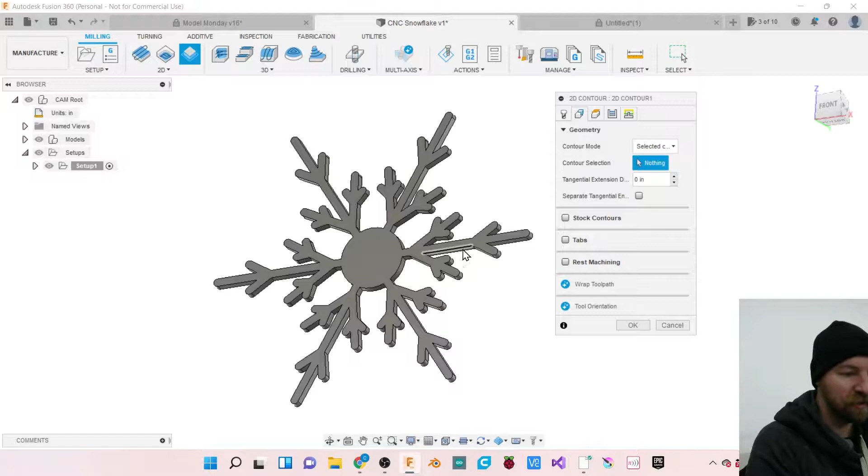All right. So the main thing that we need to pick in this geometry tab is we need to specify the bottom side. Oh, it's not going to make me. Why is it? It should let me pick the whole thing all at once, but it is not, because reasons. I should be able to just pick all these lines all at once. When I did my test before class, I just picked it all at once, and normally you just pick them all at once.

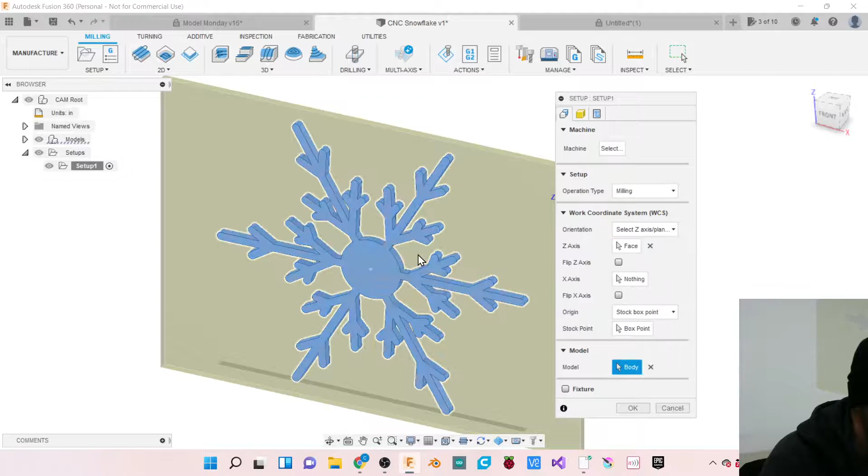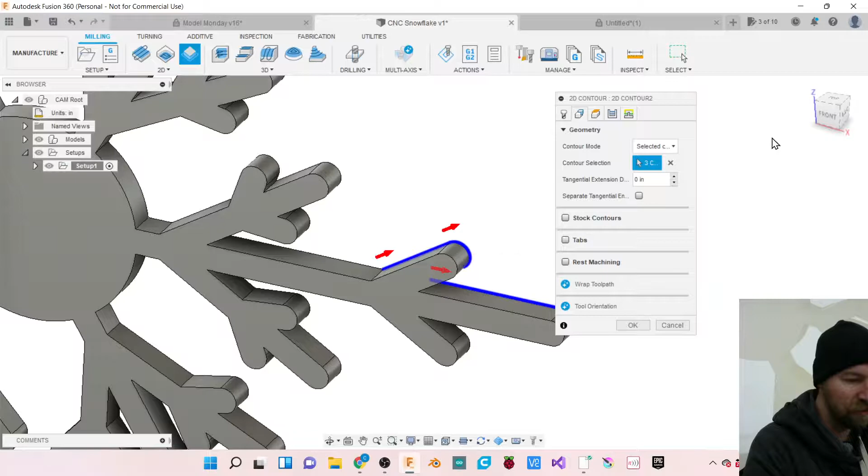Did I not specify my model properly? Yeah. In my setup here. Yeah, I've got the body selected there. I got my tool. Now the geometry, that is really frustrating. I guess I'm going to have to go in and specify each one of these lines. It didn't used to be like that. I don't know why it's like that. That's going to take forever, isn't it?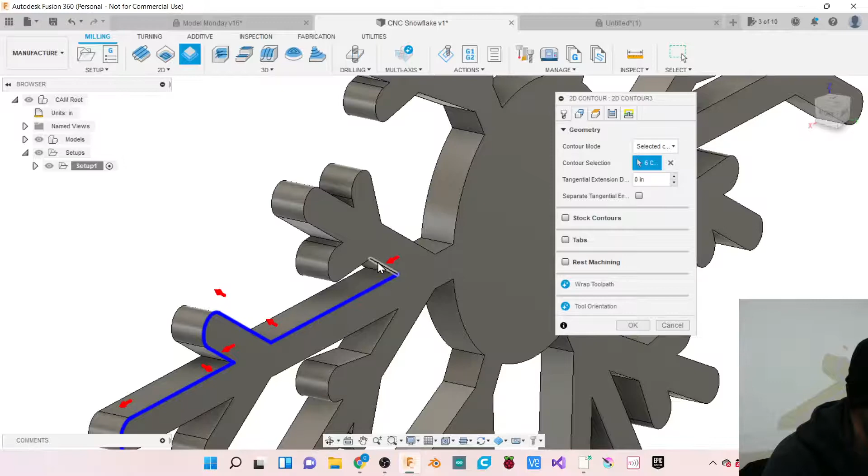I wonder if I can look at a side view and do a box selection. We can't do a box selection. Gosh, that's frustrating. So I guess we're going to have to go in and pick every one of these lines here, and then these arrows are going to get in the way, and it's going to make you zoom in and out. And if you've got a complicated

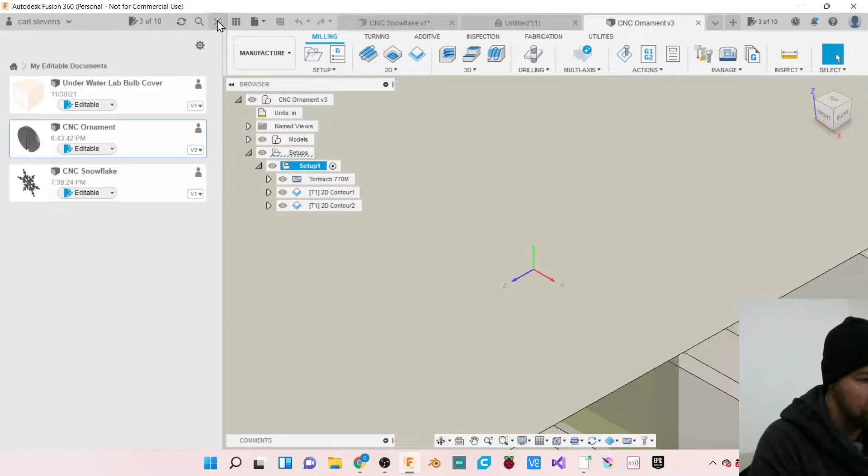Yeah, I can't click on the surface at all. It won't let me click. No, it's not letting me do that at all. I mean, in my other document, which I closed. In my other document, which is a much simpler design, however, when I say, hey, make me a 2D contour, see, I just hover over it and it lets me pick the whole thing at once. Which is real weird. Why is it?

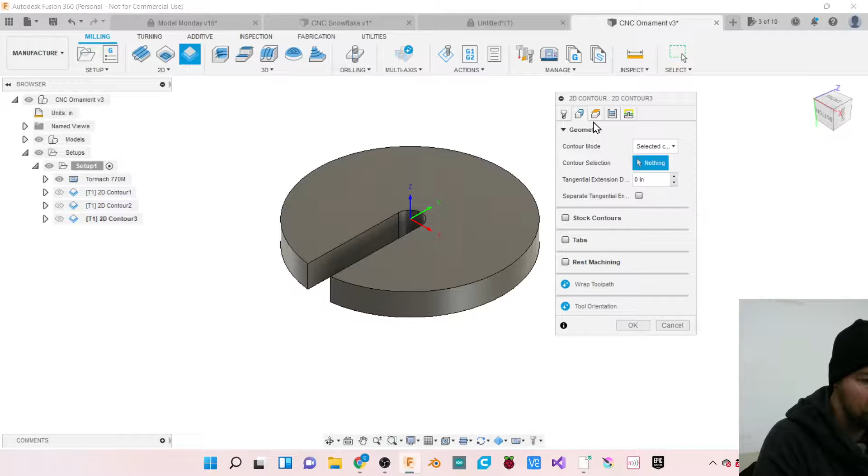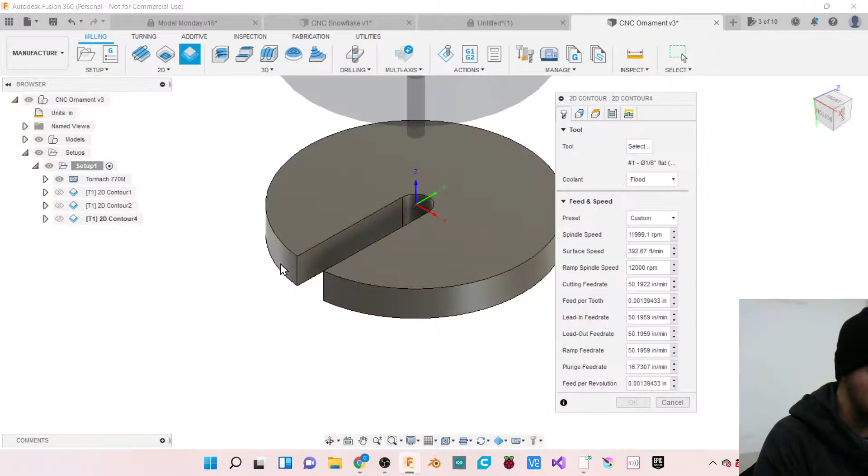What's that, Tom? Your lines were trimmed. Two corners from the snowflake arm, these individual lines all over the place. Oh, you think because my drawing was made with individual lines? Well, where you've got the lines that cross over, they're not trimmed to a point. Yes, sir. Well, that means this is going to take. I wonder if I select this first. See, here it says. It's actually this one that I want to choose.

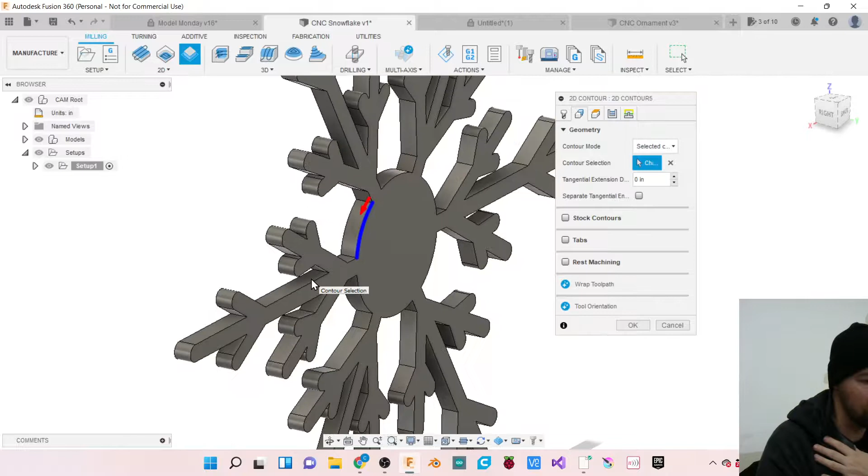Yeah, that's a pain in the butt. So it won't let me pick that at all. All right, well, we're coming up on 8 o'clock here. We're gonna have to pick this up next week, because Fusion is not liking my drawing. I did something wrong here, and I'm gonna have to do some research on why this is doing this, because it should just automatically select the entire thing.

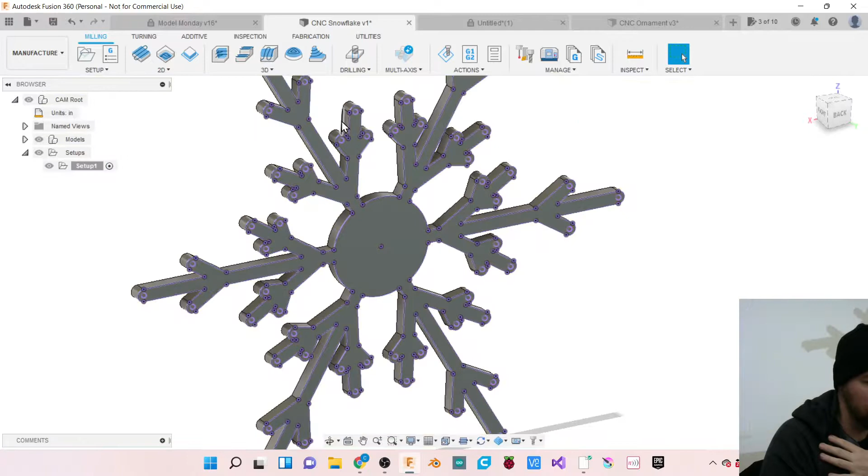I wonder, let me try one more little trick here. So now, there we go. That's a pain in the butt. So what I did was, here I'm able to select it all now as one profile. And the way that I did it was I had to make a sketch that was just all those lines.

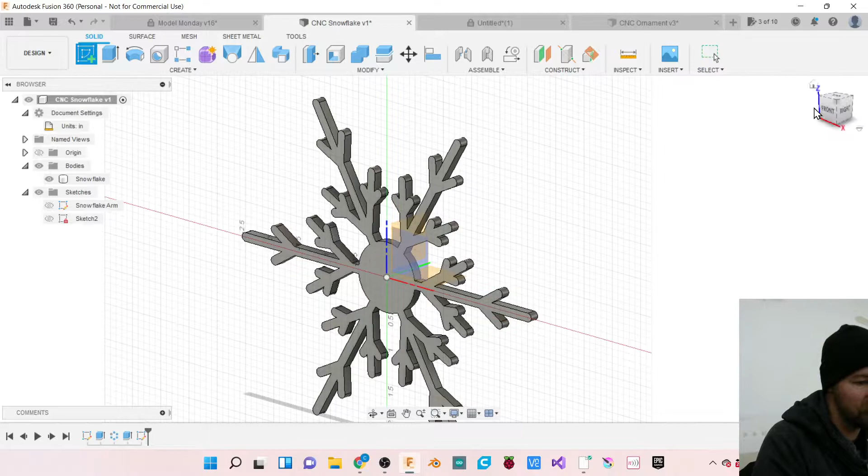So what I did is I created a new sketch in the location that I wanted, which is the back surface of my snowflake here. And then on this sketch, I just did a project of this body, and then said OK. So now I have a sketch that is just the outline of all these contours here.

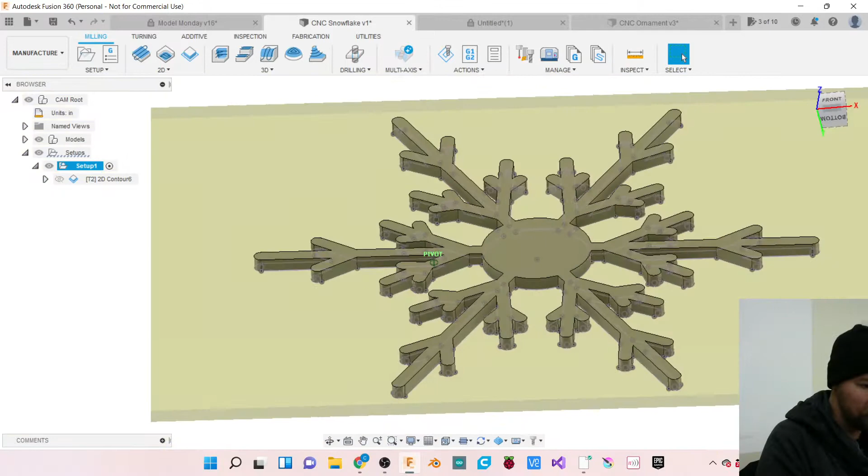And now that I have that sketch made, over in the manufacture workspace, in my geometry tab here, I can spin around so I can see that sketch. Look at that, it's doing it again. It's not letting me, it just let me select it. You saw me do it, it's recorded and everything. So, do I have to find the sketch here? There we go. I can click on the sketch over in the sketches folder, and that's the geometry that I want to define.

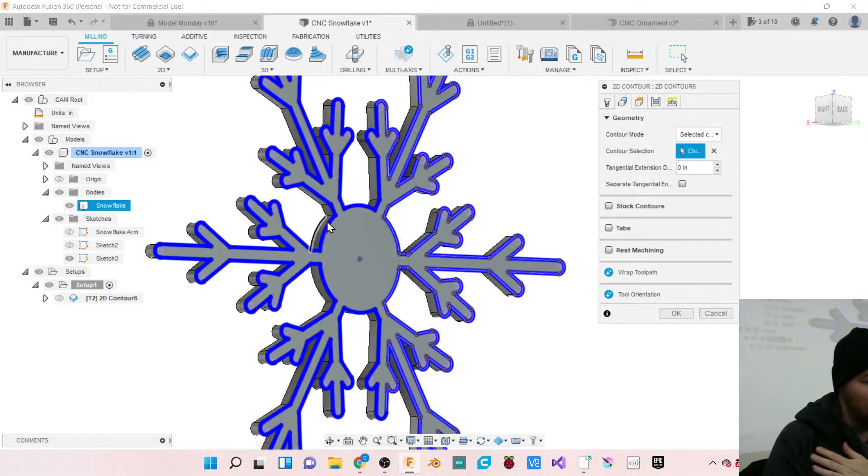The other thing that we want to do here before we wrap up is I'd like to hold this down with tabs, so you can have it make a little tab every once in a while, because otherwise if it cuts your part out completely, it's just kind of flapping in the breeze and ends up causing problems in the CNC machine. So we can give it some tabs. And then in the passes section, I'm going to come down here to this multiple depths option.

Now here's a feed and speed thing and a thing with whatever mill you're using. But in general, you want the step down that your bit goes into your... Here, if I just hover over this, there's a great tool tip. So you can see we don't want to go all the way to the bottom of our part and start milling that out. We want to just go part way into our material. So you want to set a depth for your tool to go down.

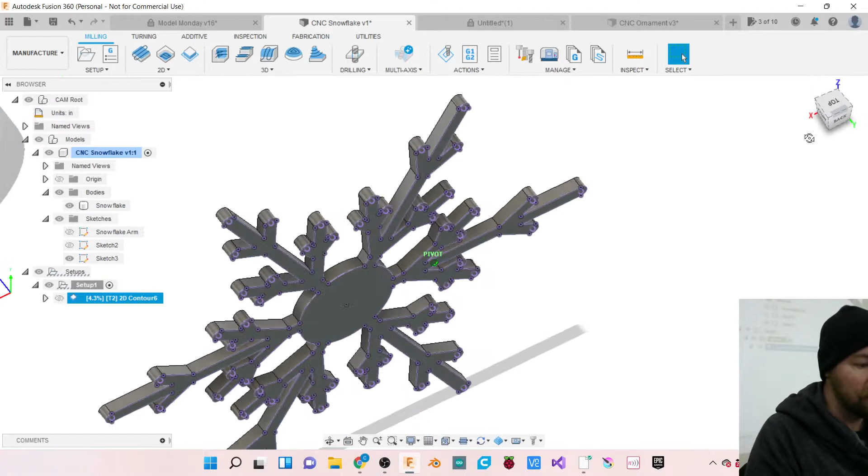And now this will probably do a better job of illustrating what that looks like once it generates this tool path. Here it's only at 4.3%. Come on, computer, you can do it. But in theory, it will generate a tool path. It's giving me some sort of weird error. Failed to generate.

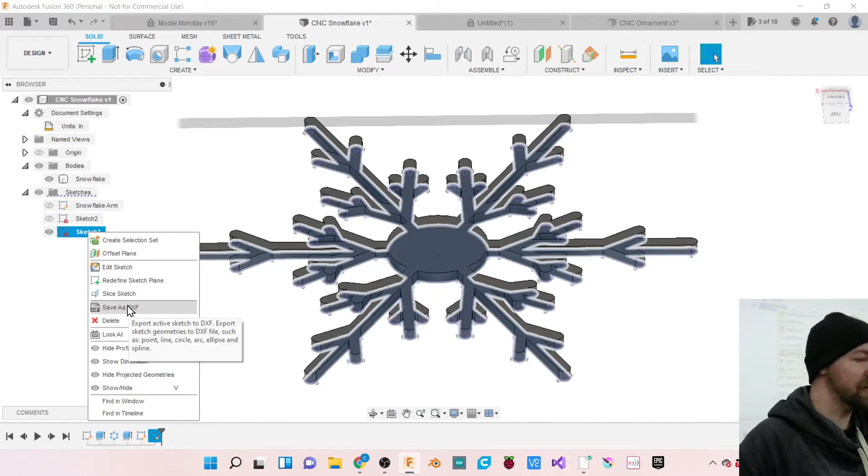So, option number 2 here if you're having problems making this: if I go back to my design workspace, here's that projected sketch that I made. If I right click on it, I can save this as a DXF, and then I can take this right to a laser and cut it out on the laser. And until next week, I will figure out why it's giving me these errors. So that'll be it for today.

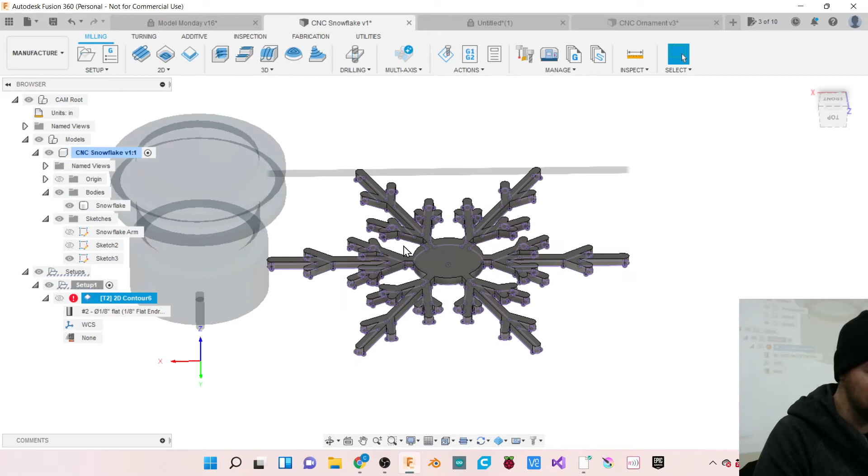Tom, I may confer with you at some point and see if you have any idea why it's giving me an error. It's not that complicated. Failed to generate passes. Maybe it's because I got a lot of corners here and it doesn't like these corners, because obviously your round bit can't get in those corners, but I'll have to do some experimenting and see why it's not working.